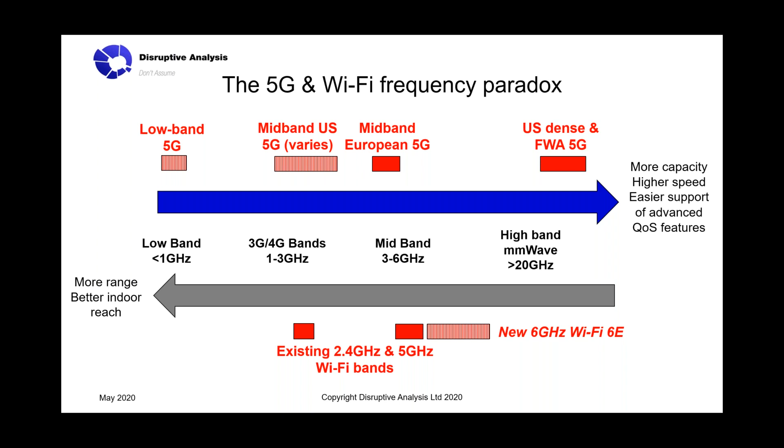In theory, we'll also see some 5G unlicensed running in that spectrum, but I suspect it's probably going to be a fair bit behind in terms of time before that gets to market. And that's again going to pose both opportunities and challenges, given it's at a higher frequency than we're used to. Now, 5G, and we'll be hearing a lot more from Vladan about private 5G.

Before we talk about private cellular, it's worth recognizing that 5G is not a monolith, and there will be multiple different phases of 5G over the next 3, 5, 7 years. And that's important because the first phase, which we have today, pretty much is just an upgraded version of 4G. It's designed primarily for mobile broadband for smartphones and also for fixed wireless access. And although there's some early IoT use cases for display screens or cameras and so on, it's predominantly been aimed at the consumer market for now.

That changes pretty much starting now or over the next 6 months, with the beginning of what I'll call here phase 2, but people listening in will probably recognize the term of release 16 of the 3GPP standards. And release 16 and then release 17 and finally 18 will have progressively more enterprise-grade features, both for service providers, but also for private networks, or as the 3GPP calls them, non-public networks, rather confusingly.

And some of the capabilities there involve what's called the standalone core network, whereas today's actually relies on the 4G core. From now onwards, we'll start seeing 5G networks that have their own new core network, which allows for things like network slicing, and it's essentially more scalable and also based on a microservices, cloud native architecture for the 5G new core, which ultimately is one of the key enablers of a lot of the other advanced features that we hope to see in coming years.

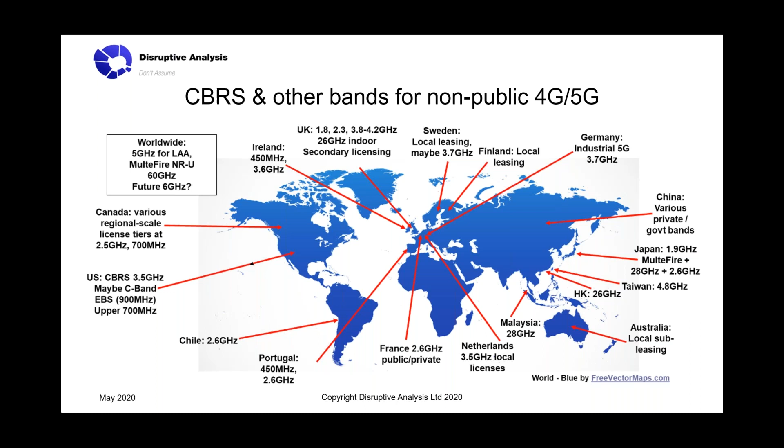But this is a very, very dynamic situation. It's also been somewhat impacted by the pandemic. In some countries, there's been an acceleration, and in some cases, a temporary halt to issuing of these licenses. But hopefully, in a few months' time, it should all settle down again.

So, what are the, if you like, winners and losers here? Well, this chart, and you'll get a chance to download it, so I'm not going to go through every square on it on this call. What I'm seeing is a sort of a fair patchwork of different approaches, what is relevant for different use cases, whether that is in-building cellular for visitors, whether it's for industrial use cases, for verticals like public safety or utilities. I think that what you'll see is that increasingly local and shared spectrum will be used in industrial sites first, but also over time, perhaps on more visitor-centric venues like hotels or maybe airports, maybe sports venues, although obviously the entertainment industry is not doing especially well at the moment.

I think that Wi-Fi, and I'll flip onto a similar slide in a moment, Wi-Fi will remain exceptionally important for what I call general IT purposes. And that's particularly connectivity for laptops, for audio-visual devices like screens, which typically don't have cellular radios in any way.

If you have things like voice assistants, and there's some, I think it's about 13 or 14 billion existing Wi-Fi only devices around the world. So there's often this discussion of Wi-Fi versus public or private 4G and 5G. I think it's a false binary. I'll talk a little bit more about that now.

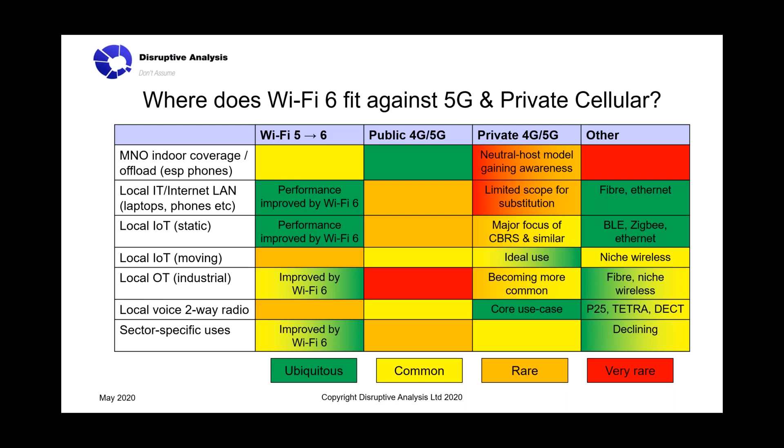And I also think that, as I've discussed before, the OT industrial operational technology side is certainly going to become more important for both the cellular and the Wi-Fi sides of this. So, just before I hand over to Vladan, how do I conclude all this? The first one is, it's very tempting always to talk about convergence, but frankly, probably for the last 20 years, I've actually also talked about divergence.

And what we tend to find is convergence on certain layers of technology stack, and then a divergence in applications or delivery mechanisms. And in this case, we're seeing a steady rise in the number of ways in which companies can get their wireless connectivity on premise, whether that's with new classes of spectrum, new classes of service provider, perhaps services that are coming from their other vendors, their cloud vendors, their IoT vendors, their industrial automation vendors.

And I think that's important to recognize, as well as the convergence message, and that there will be points of intersection between Wi-Fi and public and private cellular, but in some cases the speed and cadence of development will mean that they're actually run independently. Wi-Fi will retain a core role for a lot of use cases, and I think there's an awful lot of misapprehension at the moment that somehow 5G is going to replace Wi-Fi. It isn't. They might compete for some new use cases, but in other cases, one or the other will make complete sense, and there will be almost no overlap.

I think the demand side from IoT and also public safety, which I haven't really touched on in how you do good indoor public safety networks, that presents particular new challenges for 5G given the frequency bands, and also some other aspects such as the massive MIMO antennas. We're seeing new stakeholders and service providers emerge.

So from the design standpoint, the best option is what we call numerology number 3, which is option number 4 in this particular slide. There we have a feature of both data support and synchronization support. So all of them can change every 0.25 milliseconds. And the subcarrier spacing, which is another characterization of 5G, is 120 kilohertz.

Now that is a feature of 5G. The larger the subcarrier spacing, the shorter the TTI. So it stands to reason that for large subcarrier spacing, we have a very, very short TTI.

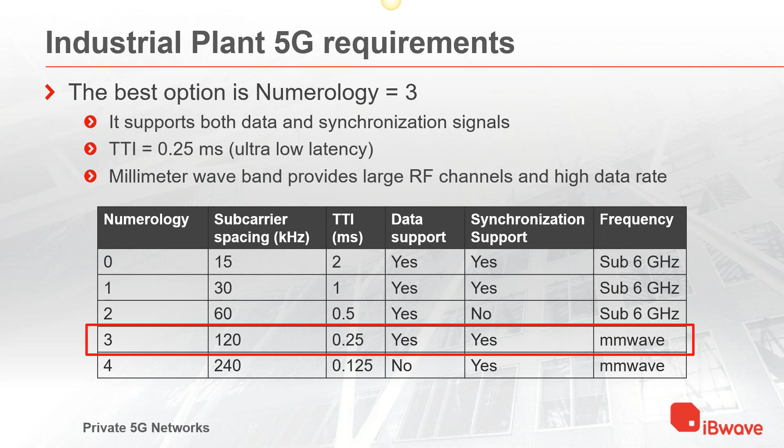Now, let's move on to industrial plant indoor design challenges. Number one, there are lots of metal objects in an industrial plant. And those are assembly line robots, industrial machines. The question is, how do you model them? How do you model them in RF design and planning software?

Then the next challenge is that a floor plan may change over time. Now, how is that possible? Well, say you have a car factory and that plant is producing a particular make and model of a car. Now, over the years, a company may decide to discontinue that particular make and start with a new make and model. So that would require that those assembly plants be redrawn and rearranged.

And that may not seem like much by the time you are putting your wireless system in there. But maybe in 5 or 10 years there is a different floor plan layout, and if you do not plan for a change, maybe you will need to go and add additional antennas.

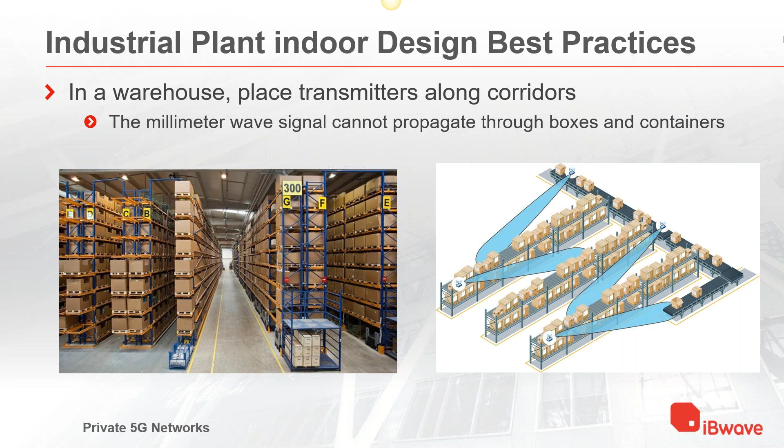The next one is to provide a redundant line of sight signal. As I said earlier, you do not have the luxury to be able to afford downtime. So what happens if the forklift stops in front of your transmitter? It will break your signal if you are in millimeter wave. Millimeter wave signals do not propagate well through solid objects like walls or cardboard boxes and what have you. So you have to have a second line of sight, a second antenna that is able to reach your transmitter. And in this case, we say that we provide for a redundant signal.

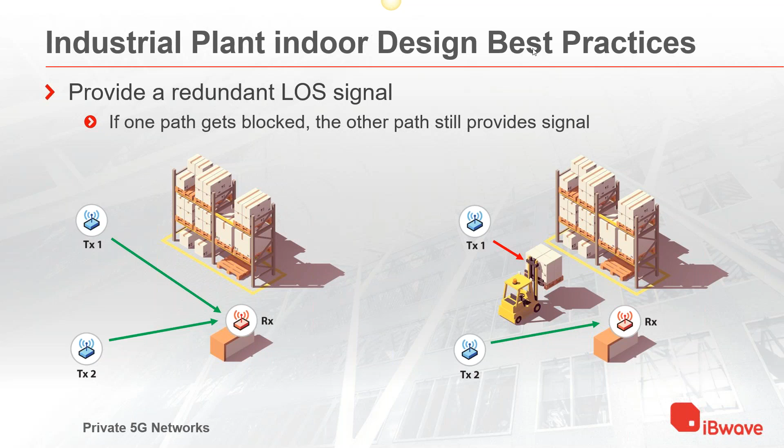Sometimes you can use large fixed metallic objects to your advantage. I told you that the signal doesn't propagate well through materials, with a few exceptions, but it does reflect very well from metal. So in millimeter wave, you can use a fixed metal object as a reflector for your millimeter wave signal to reach your sensor if the sensor is screened off behind another large object. So this shows an example of how to do that.

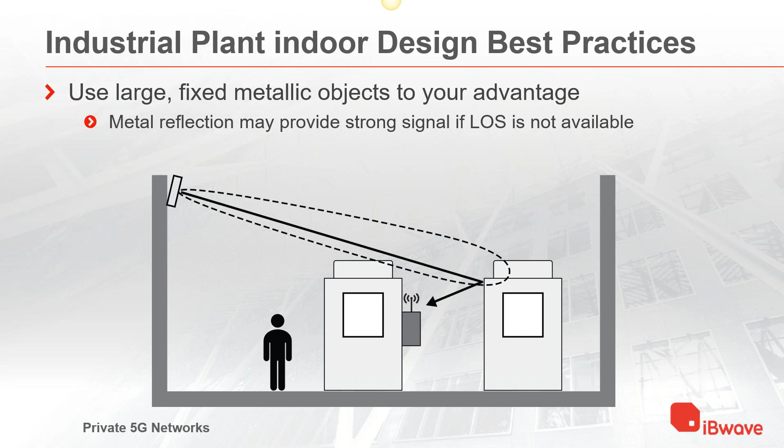And finally, as I said, indoor signals should stay indoors, and that is country specific. But if that is your requirement, then you have to be careful not to point your antenna in the direction of a glass window if you have a directional antenna, or if you have an omni antenna, don't put it near a glass window at all. So if you do have directional antennas, don't point at the window, but point inside the area. That would limit your signal leakage very well, because the outer walls in a factory are usually concrete walls, and they do not let millimeter wave signals out at all.

Now, finally, I'm going to talk a bit for the last 10 minutes or so about this case study of a design of a millimeter wave 5G network in an industrial plant. So I am going to use a synchronization signal to plan coverage, and I'm going to use numerology number 3 to achieve ultra low latency. So my SCS, or subcarrier spacing, is 120 kilohertz. That corresponds to numerology 3.

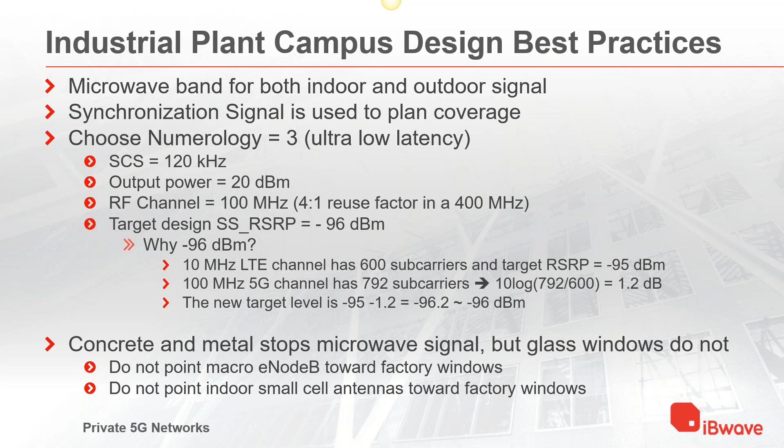So now I have to switch my screen to the demo. And this is a 2D presentation of my industrial plant factory. Those areas that you see that are a little bit darker are the areas where you actually have metal machinery. And what you have above it are 5G multi-beam antennas. I'm going to go quickly and show you what those antennas look like.

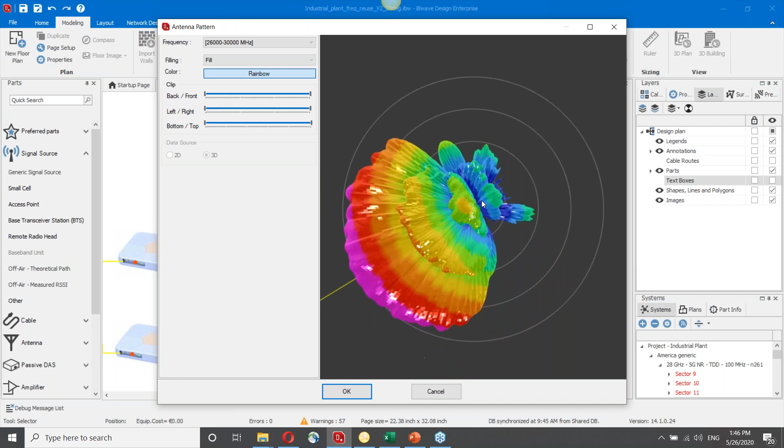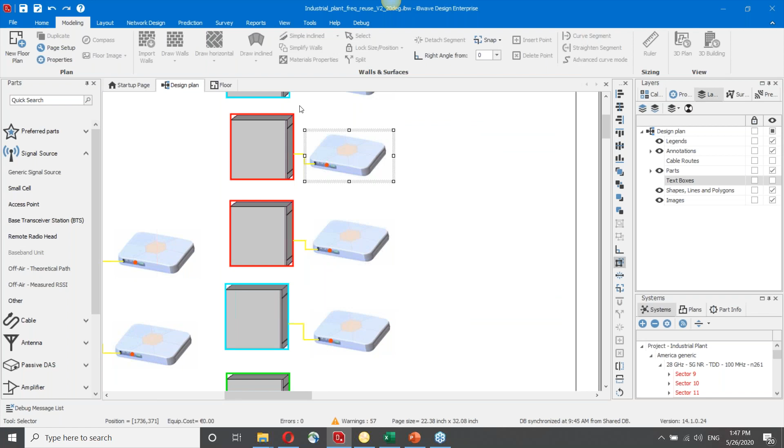So this is your pattern. Those are multi-beam antennas, and they are operating at 28 gigahertz. And from the specs here, we can see that the gain is 9.95 dBd, a little bit over 12 dBi. Right? So going back to the industrial plant, my goal is to point them down towards these areas with metal machines, and I have to also somehow model the losses that those machines have.

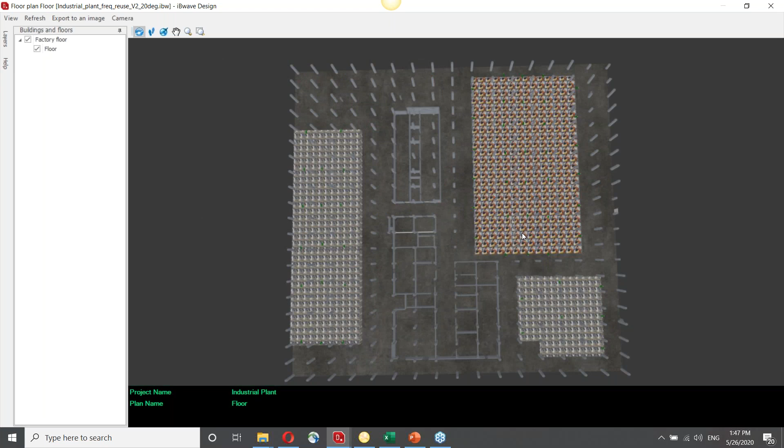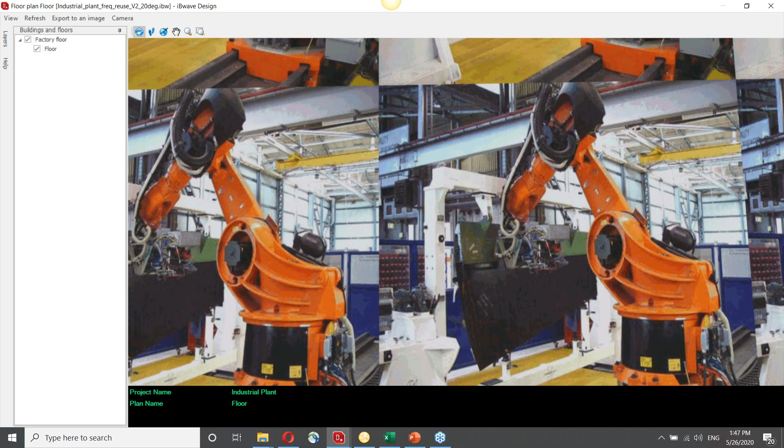So I'm going to go to the 3D plant to give you an idea what it looks like. What you are seeing here is the areas where the machines are. This area here has a little bit of a reddish hue. I called it the heavy machinery area, and you can see pictures of how that may look. This area here is what I called the light machinery area, and they are modeled a little bit differently. So what I have done here, I have actually placed antennas above, and I'm going to give you a little bit of a better angle to see where they are.

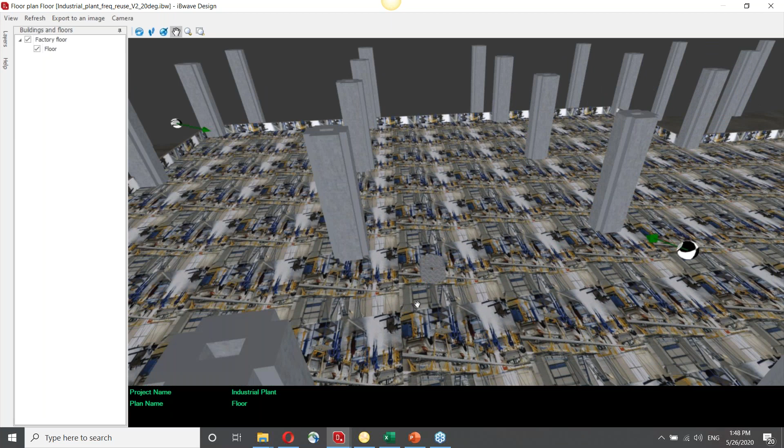Okay, so there is one of them. As you see, it is pointing straight down. That antenna is about 4 meters above the floor, whereas this heavy machinery, light machinery area is about 2.5 meters above the floor. You will see also that I have placed them toward the edge of the area pointing down. So whenever I could, I would place them over the edge of an area, but I also have antennas that are pointing down that are in the middle. So you see there is one over here and one in the corner and one over there.

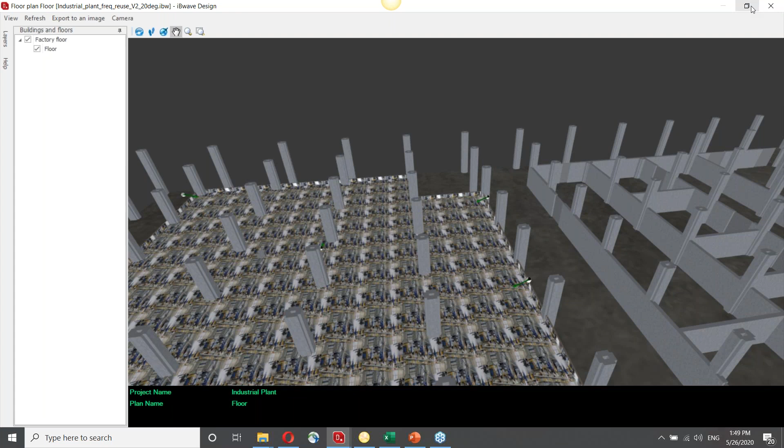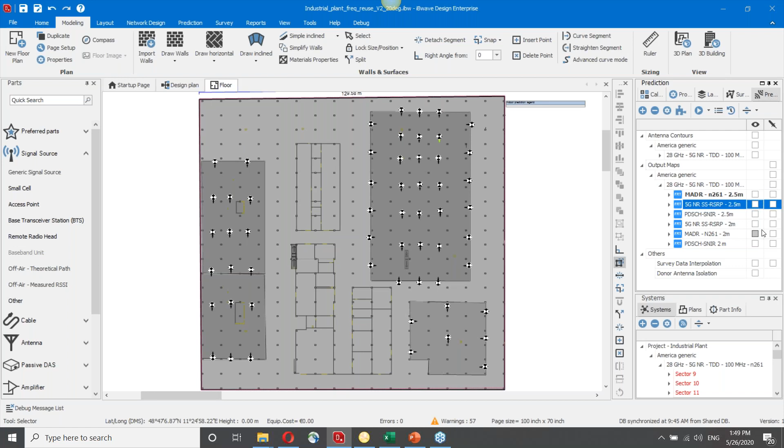So again, my goal is to have -96 dBm SS-RSRP. And what I am going to show you now is how I achieved the coverage. Oh, by the way, the penetration loss is different for the heavy machinery area and light machinery area. We will get to that in a second. But first, for the first analysis, I'm assuming that my RSRP is going to be recorded at the top of the machinery.

Okay, and as I said, this is supposed to be -96 dBm, so I am now showing you in my legend 2 colors. RSRP greater than -96 is red, and the one that is less than -96 is blue. So everything that is red is good coverage. And so if I want to show you how it compares with the area where the heavy machinery is, I'm just going to move the horizontal surfaces above, and you see that's the area where the heavy machinery is. So that area is red, meaning that RSRP is very good. So I have achieved my goal, assuming that all the sensors are located on top of heavy and light machinery.

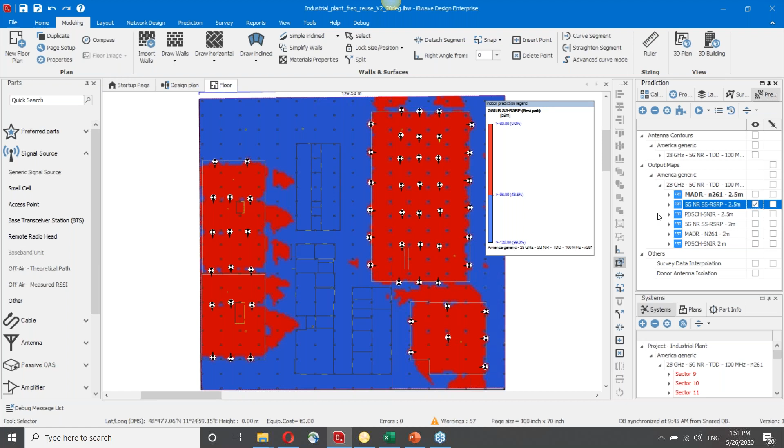Now the second one is if I put my sensors not on the top of the machine area, but a little bit below. Remind you, the machinery area is 2.5 meters tall. And in this example, I put sensors at 2.5 meters. I'm going to put sensors at 2 meters, which means now they're going a little bit deeper inside the area where the machines are. When I do that, the coverage is all of a sudden not so good. The coverage has shrunk, right?

So just to make sure that you understand how it is, I'm going to move the horizontal surface above the prediction. You see those within rectangles, I have a lot of blue. So that really means that having your millimeter wave signal go through the area with the penetration losses is going to hamper your coverage quite a bit. So you don't have good coverage if your sensors go about half a meter deep into your machinery area. So this is just an illustration of the issues that you may find yourself facing out there.

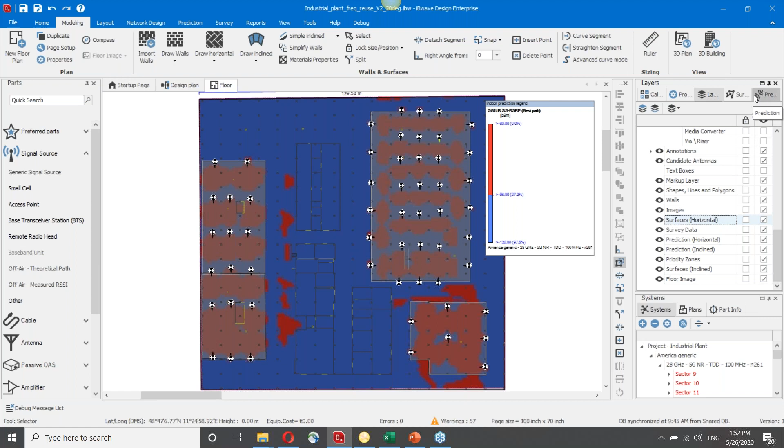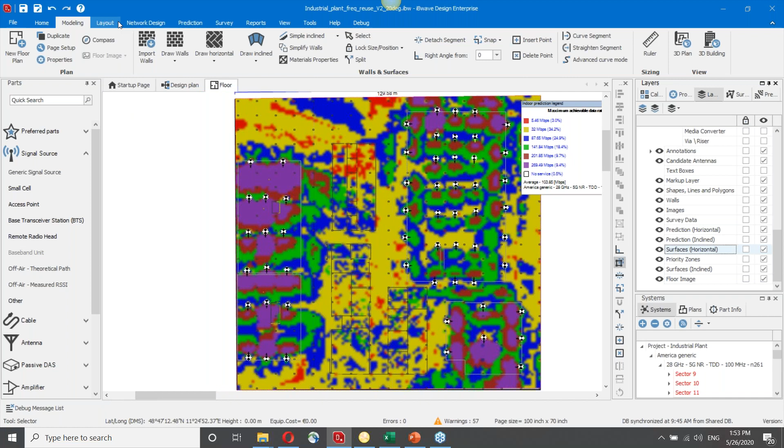Now, a similar situation is if you look into MADR. MADR is maximum achievable data rate, and there I'm going to move these surfaces down and just move a little bit to the left, so you will see how it looks in this area here, where it is very clear. And mind you, this is 4:1 frequency reuse, right? So there you see that I have a MADR of about 270 megabits per second. Those are 100 megahertz channels.

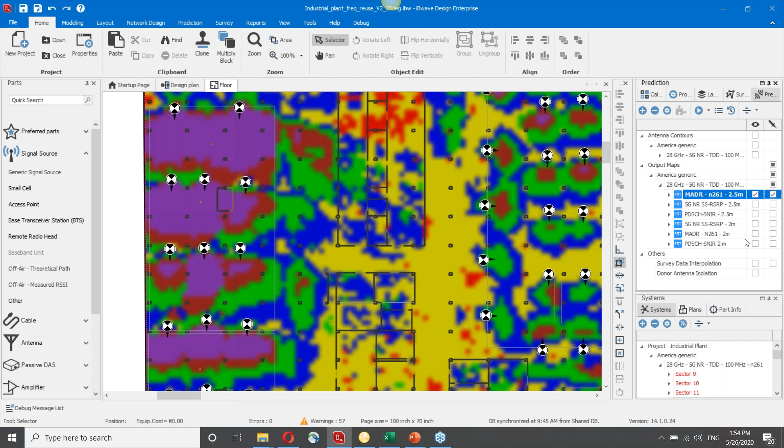When you drop it down within the clutter, then what's going to happen again? It is going to drop significantly, right? So for example, here the upper one shows you at 2.5 it was almost 270, and then it went down to 201 if you dropped it into the clutter. Here, it is about the same, but here there is a definite delta, and so on and so forth. So that's what I wanted to show you.

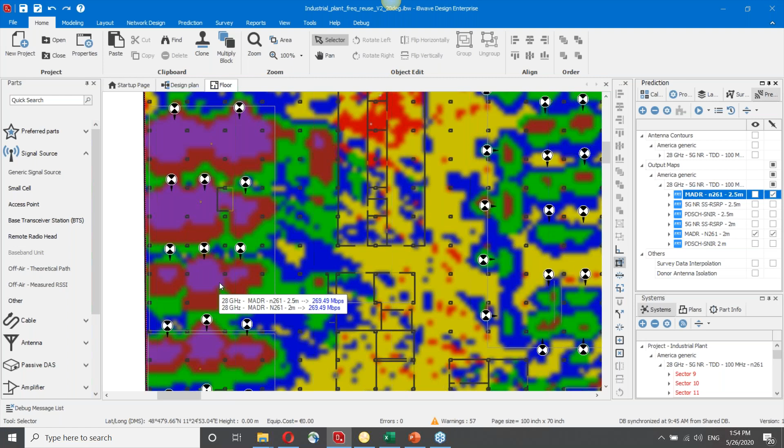Keep in mind that this all is done with the 4:1 frequency reuse. We had a 100 megahertz channel out of the total of 400 megahertz, and we needed to use quite a few antennas to achieve this coverage. To give you a sense of how big this is, this is about 130 meters across, and I think it's about 170 or 180 all the way down.

So this is quite a big factory. It is not humongous, but it is not small by any means. If you want me, I can tell you in feet. This is about 400 feet across.